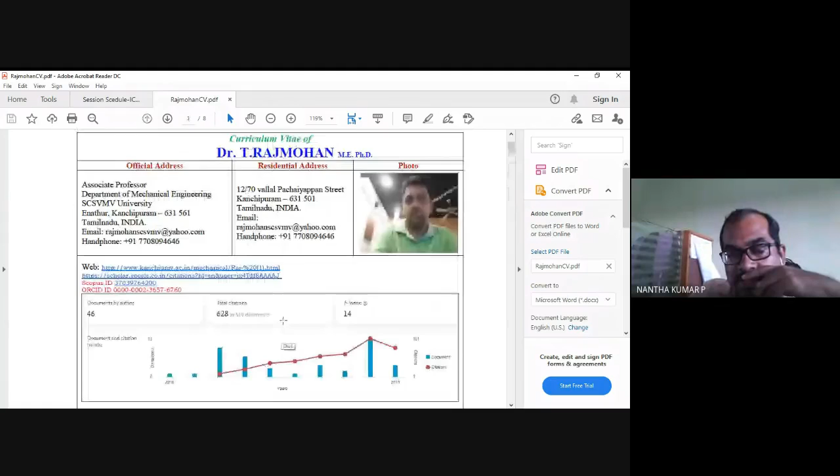Sir, the session is yours. If you want to talk to the audience, you can inform them about the rules and regulations, all these things, sir. Yes, sir. Okay, no problem. Rules and presentation, sir. Yes, sir.

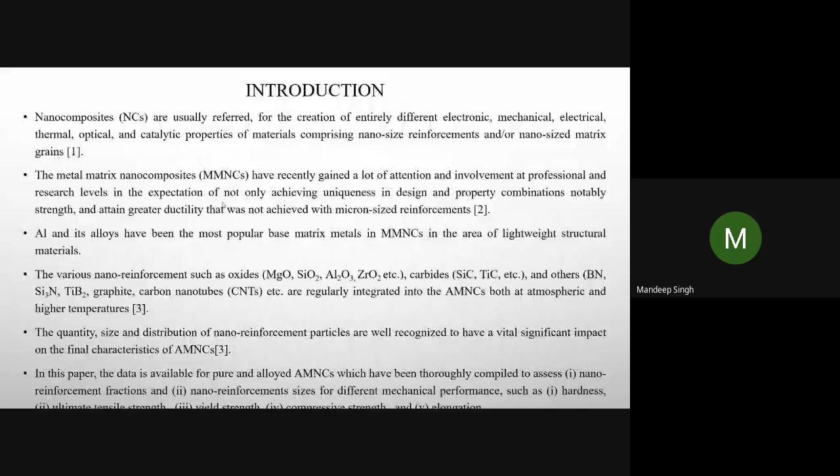So next, in the literature review, we are starting the mechanical properties with the hardness. So what is the hardness? Before starting, what are the mechanical properties? The mechanical properties involve a reaction to an applied load that determines the range of usefulness of a material. The most common properties are considered in this review paper.

So first is the hardness. Hardness is the measure of a material's resistance to localized permanent deformation. The nano-sized reinforcement increases the dislocation density in the base matrix as per the proper particle size distribution. The higher the reinforcement applied to an optimal value, the more constraints on the dislocation movement would be. Hence, the overall hardness of AMNC will increase.

So Poovazhagan and others revealed the increased hardness progressively of the AA6061 B4C nanocomposites by increasing the nanoparticle volume percentage as 0, 0.5, 1, 1.5, 2, 2.5, and 3. The strong bonding of aluminium with the boron carbide nanoparticle prevents the dislocation movement, causing the improved hardness to 91 BHN Brinell hardness at 2.5 volume percent nanoparticle, as opposed to the 40 BHN of the base alloy.

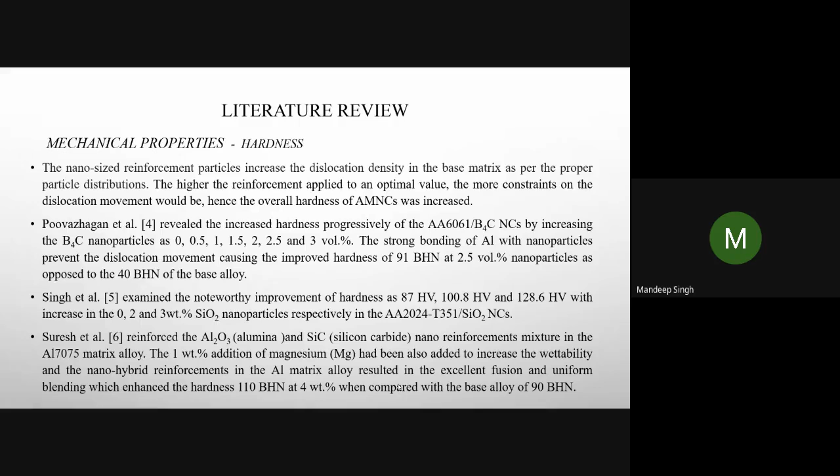Then next we have Suresh and others, who reinforced the alumina and silicon carbide nano reinforcement mixture in the Al7075 matrix alloy. The 1 weight percent addition of magnesium has been added to increase the wettability of the nano hybrid reinforcements in the aluminum matrix alloy, which resulted in excellent fusion and uniform blending, and resulted in increased hardness to 110 Brinell hardness at 4 weight percent when compared with the base alloy of 90 Brinell hardness number.

The graphene nanosheets refined the grain size more homogeneously, leading to increased dislocation, Orowan strengthening mechanism, and the consequence of thermal mismatch. The hardness was enhanced to 174 Vickers hardness for the aluminium graphene nanosheets nanocomposite, in contrast to the 81.2 Vickers hardness of the base matrix.

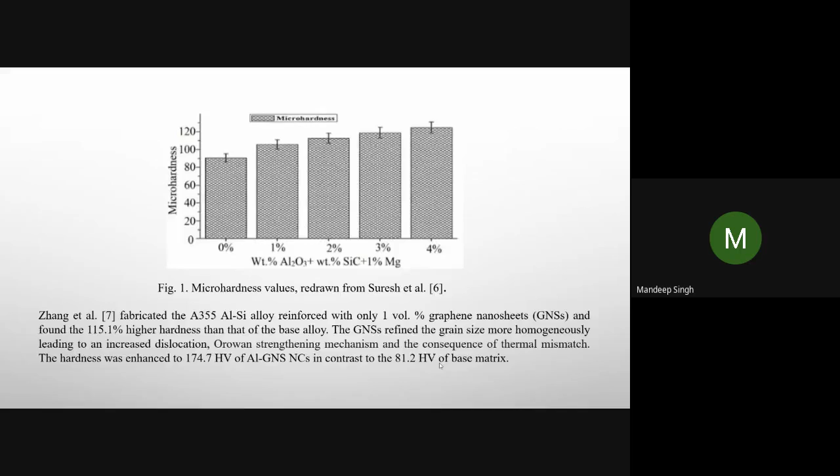Then we have the second mechanical property, that is the ultimate tensile strength. So what is the ultimate tensile strength? It is the ability of a material to resist tearing due to tension. It is measured in pascals, or it has units of Newton per meter square. It is investigated from the published studies that the UTS of the AMNC has been strengthened by the nano reinforcements. The tight intermetallic bonding causes the wettability.

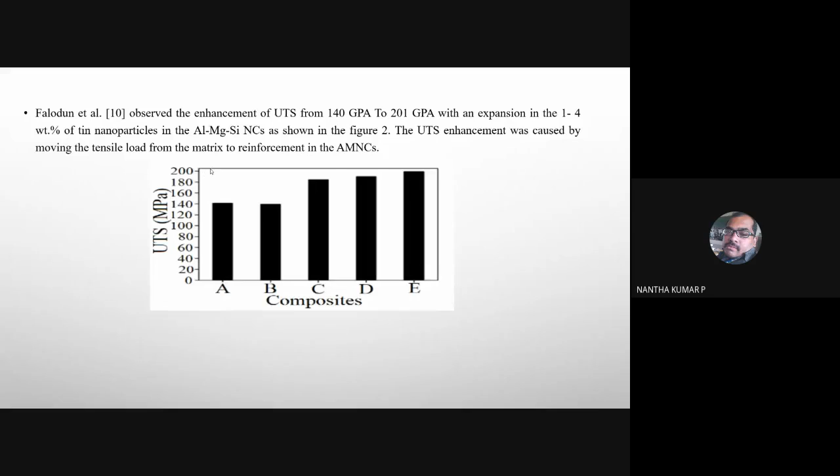Sorry, dear sir. Mandeep, sir, please conclude yourself, sir. Yes, chairperson advised 5 minutes for presentation. Can you conclude, sir? It is a review paper, so I have reviewed from the different... No, no, 5 minutes for presentation, sir. Let others also present. Okay, let me wind up. Yes, please, please. Thank you, thank you, sir.

So Poovazhagan and others indicated a 125% increase in ultimate tensile strength of the AA6061 boron carbide nanocomposite in contrast to the alloy. The boron carbide nanoparticle improved the ultimate tensile strength at 0.5, 1, 1.5, and 2 volume percent.

But the aforementioned beneficial effect of adding nanoparticle weakens the AMNC, which diminishes the UTS. This is due to the high dislocation density and the interaction of the dislocations with the ultra-high nanoparticles. So the nanoparticle at the grain boundary interior shows homogeneous dispersion, which improves the UTS of the AMNC.

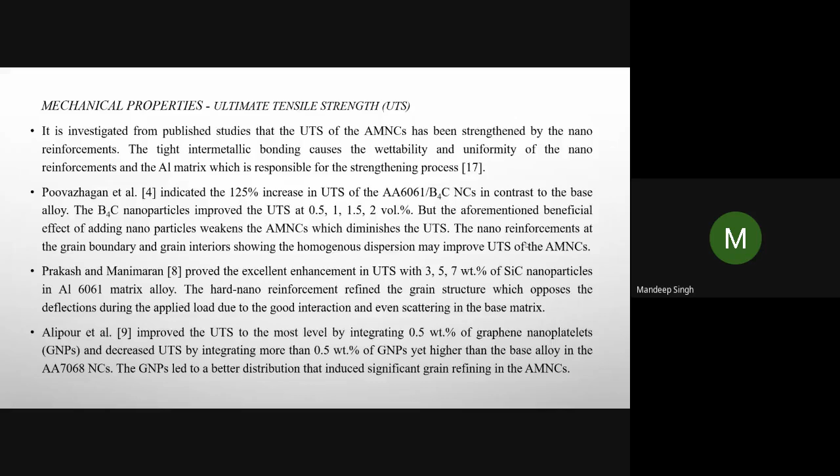Coming to the yield strength: what is yield strength? It is defined as the maximum stress that a solid material can withstand when it is deformed within its elastic limit, or it can be defined as the stress at a point where the stress-strain curve deviates from proportionality. That is the yield strength of the material.

Li and others made use of TiN nano reinforcement particle by varying the weight percentage of 1, 2, 3, and 4 in the Al2024 alloy. The increasing titanium nitride content improved the yield strength up to 3%, and the value recorded at 2 weight percent was 730 megapascals, which was 185% higher than the baseline.

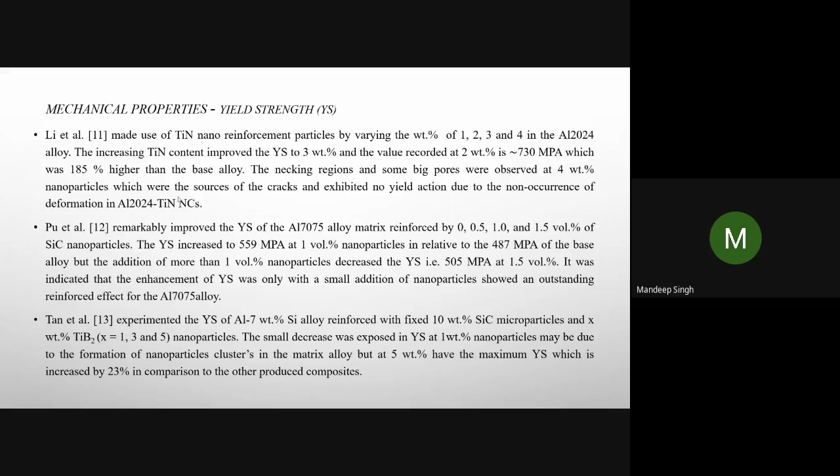The reason is that necking regions and some big pores were seen at 4 weight percent nanoparticle content, which become the source of cracks and show no yield action due to the non-occurrence of deformation in Al2024 titanium nitride nanocomposites. Then the next mechanical property we have is the compressive strength.

What is compressive strength? It is the maximum amount of compressive stress that a material can withstand before it breaks or fractures. Izadpur and others studied 0.4, 0.8, and 1.28% of aluminum oxide nanoparticle in the...

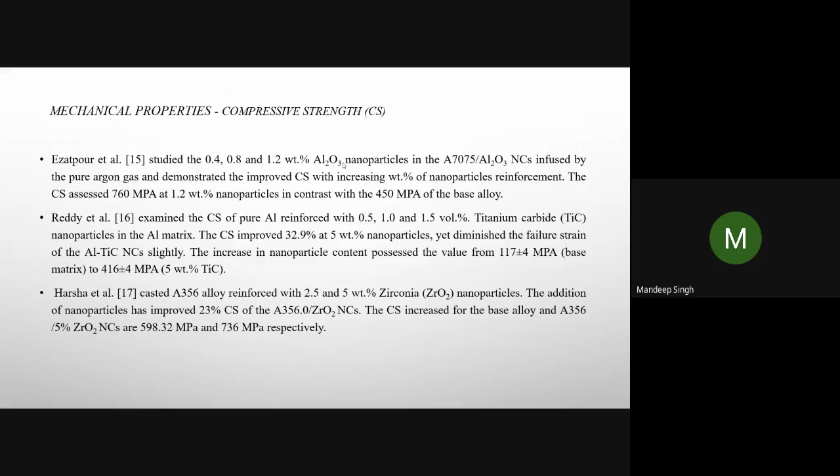Conclude yourself, sir, please. Okay.

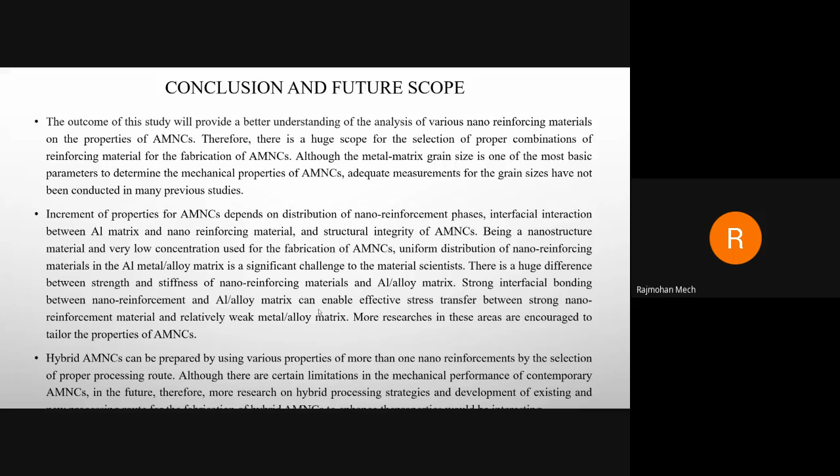So while you... Sir, I have just reviewed the properties regarding the comparison of disadvantages of microparticles. You should also investigate the advantages of nanoparticles over microparticles by comparing them. So many comparisons are available in the literature, which would make it a better study. Okay, sir, I agree.

One more question: whether the nanoparticle will act as a filler or reinforcement? Sir, nanoparticle acts as a reinforcement. Then what is the difference between filler and reinforcement, sir? Sorry, sir, it can be... Okay, okay sir, no problem.

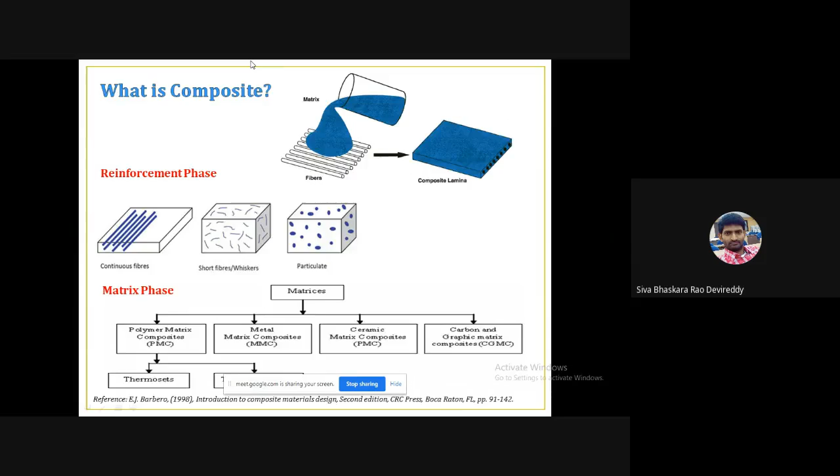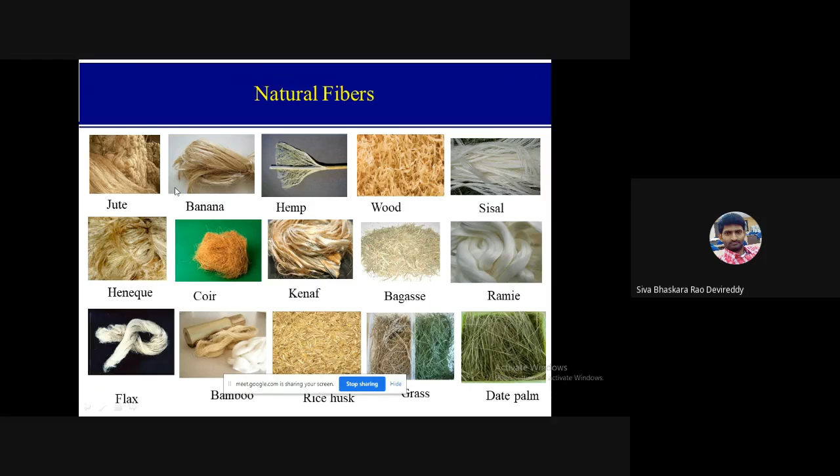Coming to the reinforcement phase, these may be synthetic or natural fibers. Nowadays, due to environmental concern, many researchers are working on natural fiber reinforced composites. The slide represents different natural fibers available in nature. Examples are jute, banana, hemp, wood, sisal, heneque, coir, kenaf, bagasse, ramie, flax, bamboo, rice husk, grass, date palm. So many natural fibers are available in the literature.

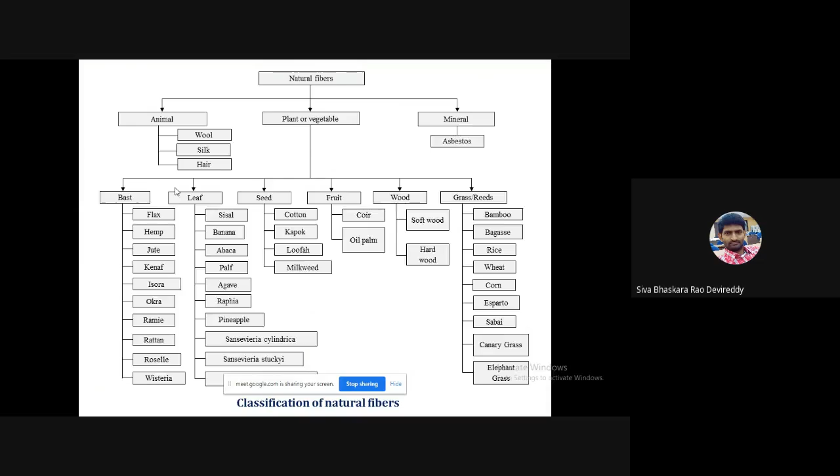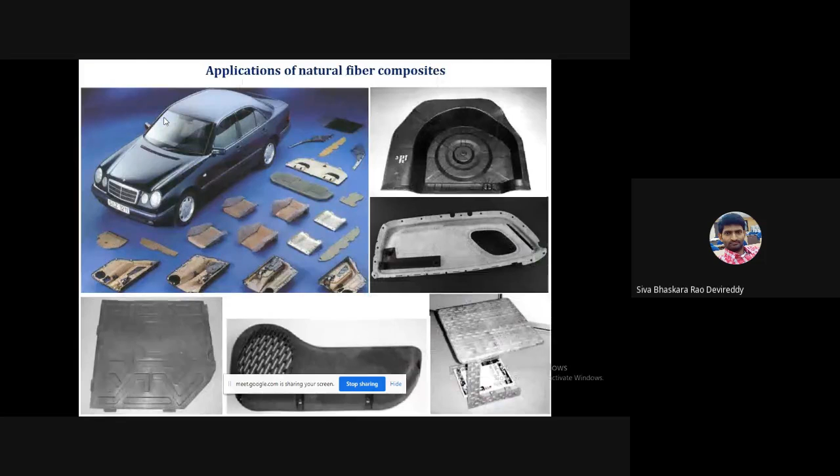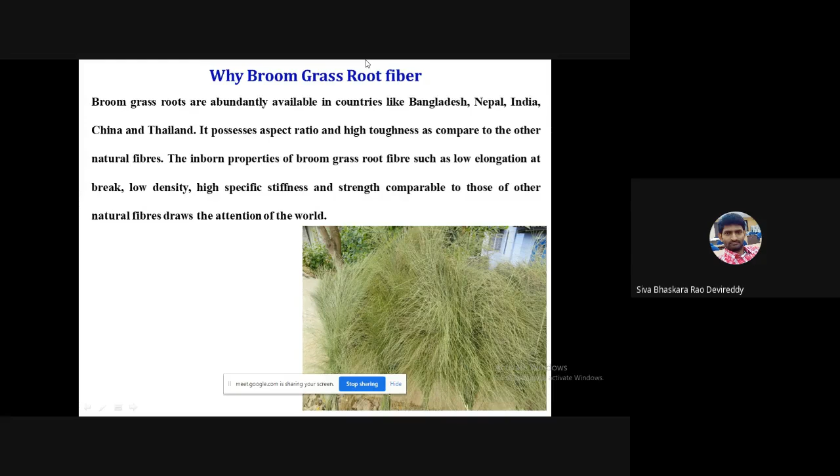Out of these natural fibers, we selected broom grass root fiber as one of the reinforcement materials in our research work, because broom grass root is available in countries like Bangladesh, Nepal, India, China, and Thailand, and possesses high aspect ratio and high toughness compared to other natural fibers. So we selected broom grass root as one of the reinforcement materials to fabricate the composite. The main properties considered to select broom grass root are low elongation at break, low density, high specific stiffness, and strength compared to other natural fibers.

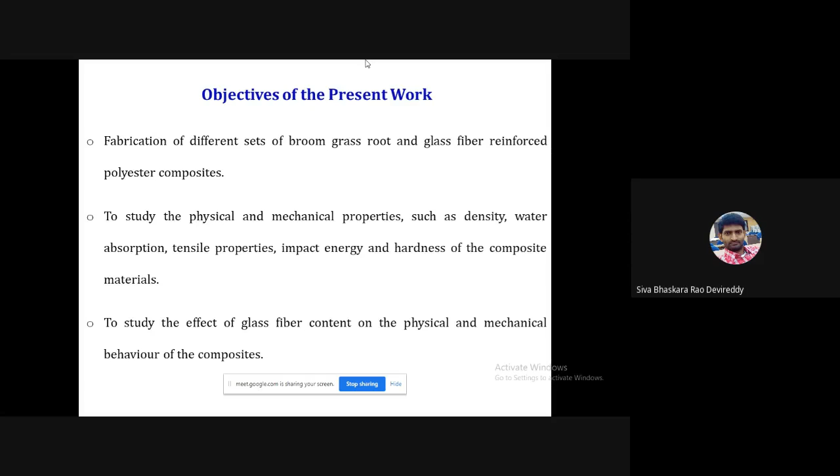The main objective of this present work is to fabricate different sets of broom grass root and glass fiber reinforced polyester composites to study the physical and mechanical properties. In physical properties we studied density and water absorption; tensile properties such as tensile strength and modulus, impact energy, and hardness of the composite materials were studied. Another objective is the effect of glass fiber content on these properties.

Coming to the materials selected to make the composite, polyester is the matrix material we have selected. The polyester and corresponding catalyst and accelerator are purchased from ECMAS Resin Private Limited, Hyderabad.

The density of this polyester is low as compared to the epoxy, that is 1.13 gram per centimeter cube. Broom grass root is selected in the particulate form. Initially, the broom grass is collected from local sources, washed with clean water, and made into powder form. In a particulate form, we are making this broom grass root.

Glass fiber mat is selected as another reinforcement material. Using these two reinforcements and polyester matrix, the composite is fabricated by the hand lay-up technique followed by light compression molding. For curing this polyester, 1.5 weight percentage of catalyst and 1.5 weight percentage of accelerator were mixed.

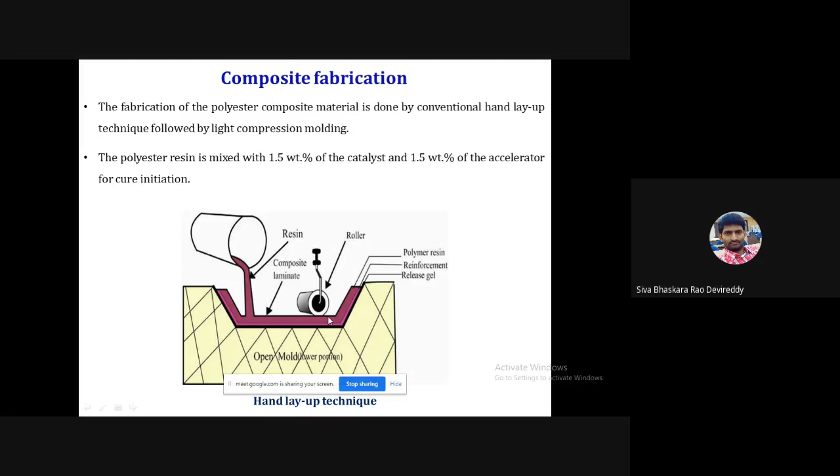After mixing the polyester with the catalyst and accelerator, the broom grass root particulate is added into the polyester resin, and the glass fiber was placed layer by layer. By using this hand lay-up technique, the composite is fabricated. Initially, the polyester is applied over the mold and the glass fiber mat is placed in such a way as to get 4 mm thickness.

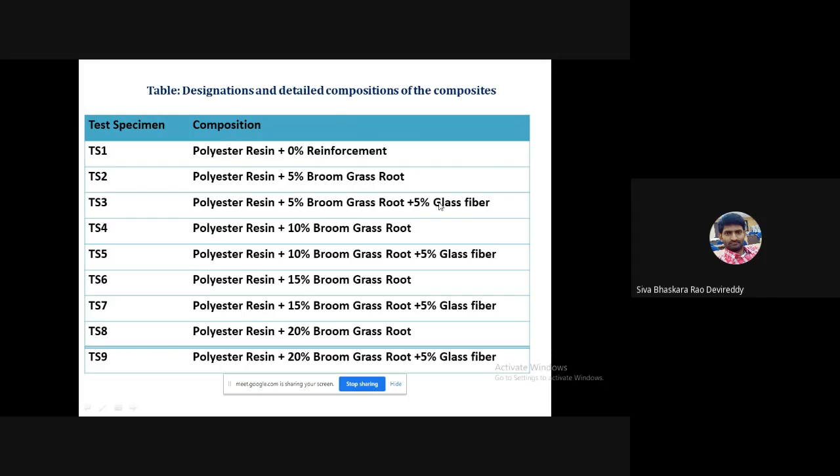A total of 9 sets of composites are shown in this table. These are the composites fabricated using this hand lay-up technique.

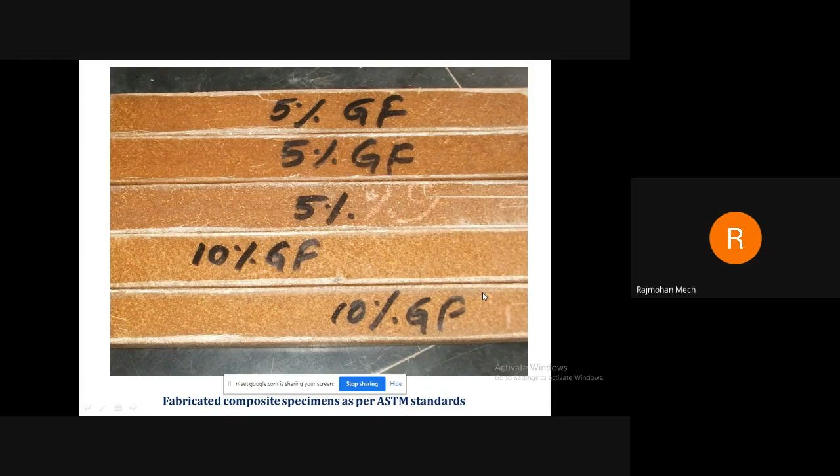Sir, 5 minutes are allowed for presentation. Okay, yes sir. You have wasted your time. You are giving introduction and other applications. Directly go to results and discussion. Conclude, sir, because other participants are waiting. Yes sir, in 2 minutes it will complete.

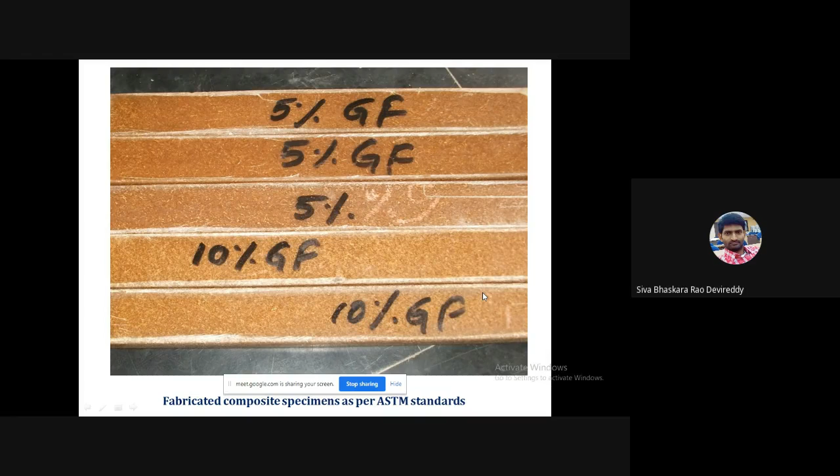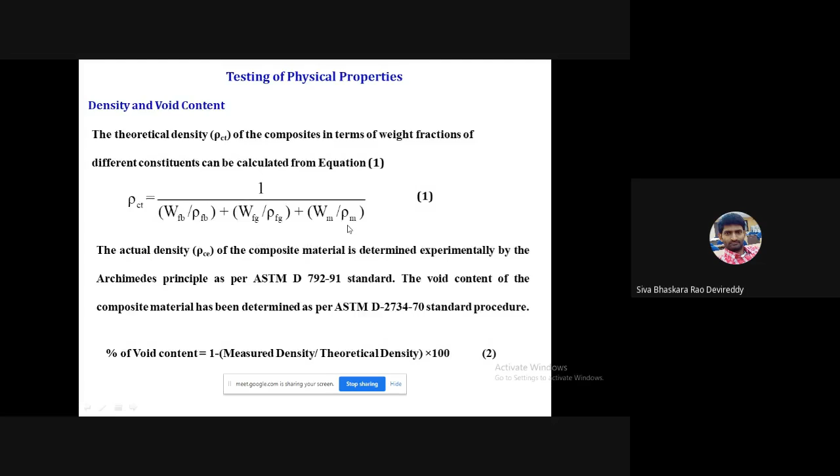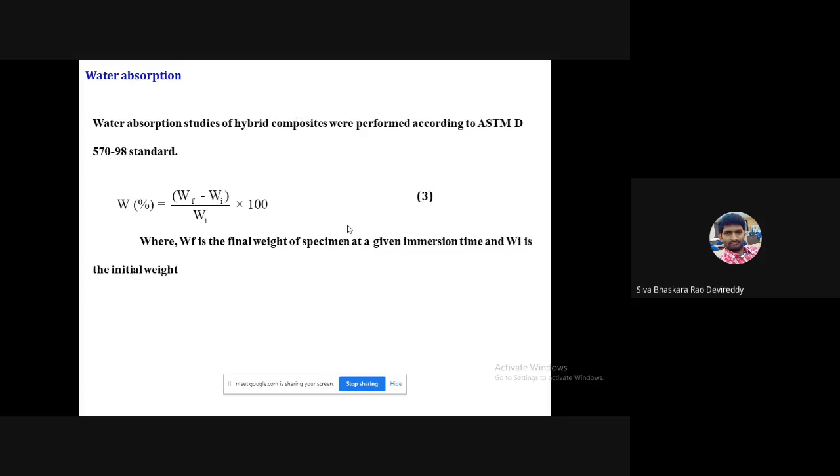These are the fabricated composites with different percentages of broom grass root and glass fiber. Next, coming to characterization, density and void content were calculated. The theoretical density was calculated by equation 1, given by Agarwal and Broutman, and experimental density is calculated by the Archimedes principle. The water absorption of the composites was performed as per ASTM D570 standard. The difference between the specimen's weight before and after immersion was taken and calculated using this formula.

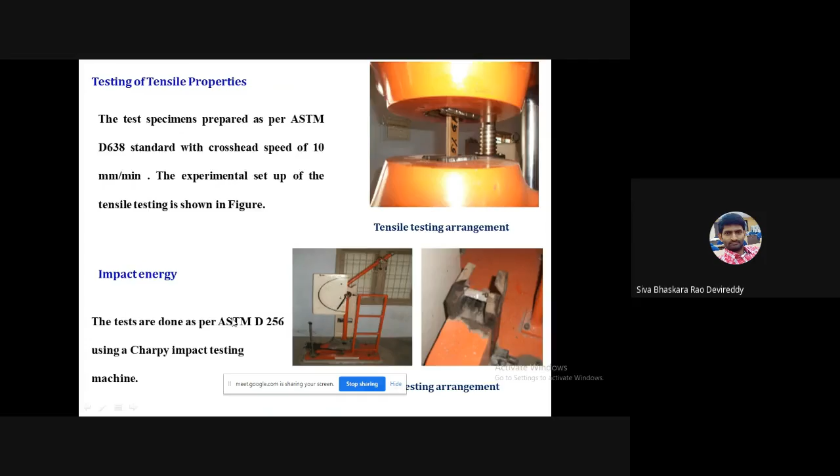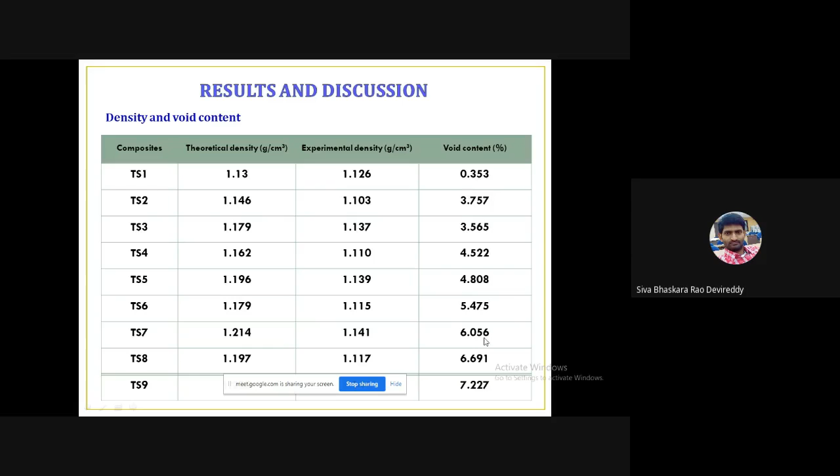Coming to the results and discussion, theoretical density and experimental density are shown in this table. The difference between these two gives the volume of void content. By increasing the fiber content, the void content of these composites increases. Water absorption of the composites also increases with immersion time. The maximum water absorption was observed for the composite TS8, which has 28% broom grass root without any glass fiber.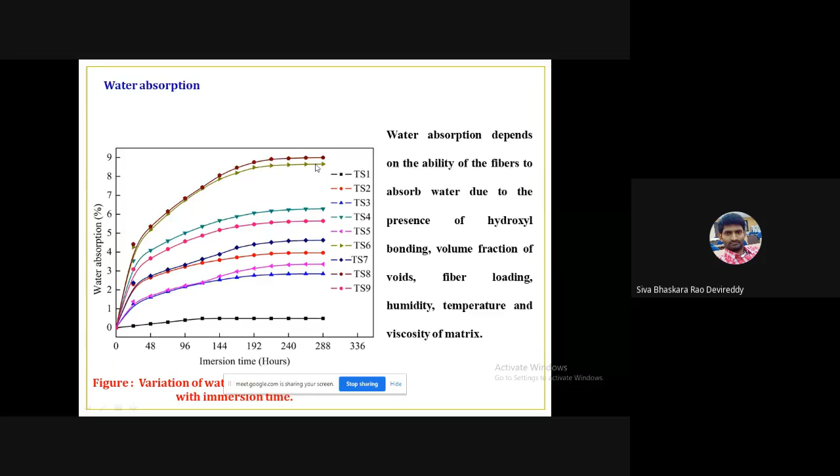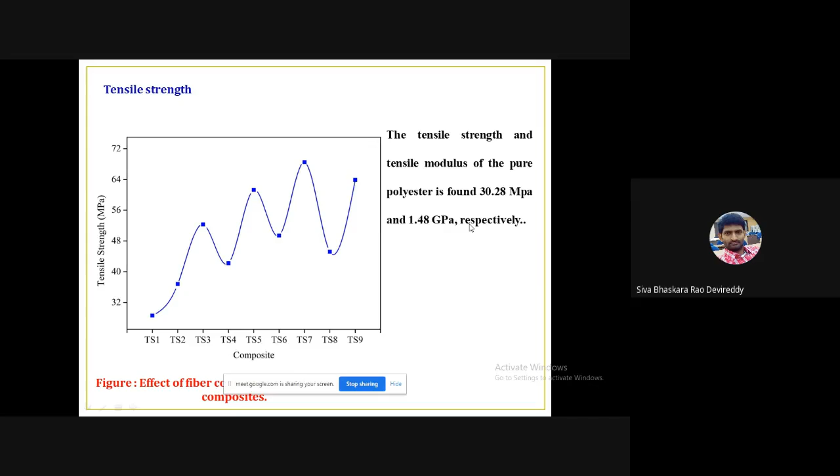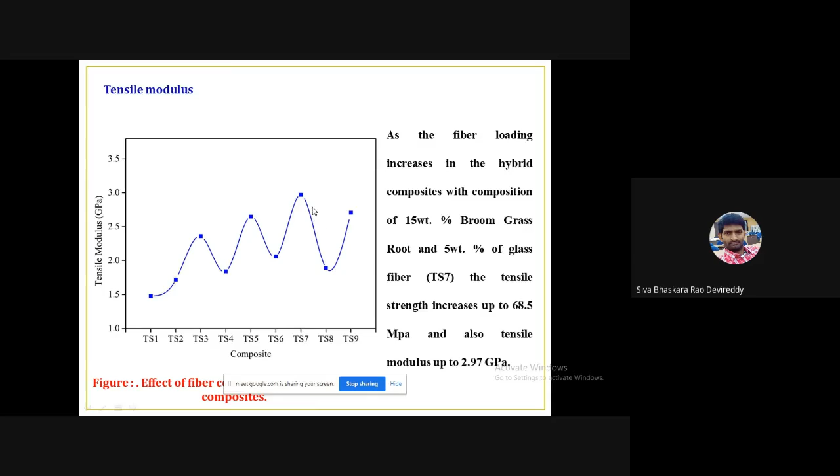Tensile strength of the composite. In the tensile test, we calculated tensile modulus and tensile strength. Initially, the neat polyester has a tensile strength of 30.28 MPa and tensile modulus of 1.48 GPa. When adding the reinforcement phase, both tensile strength and modulus increase, and the maximum tensile strength is 68.5 MPa and tensile modulus increases up to 2.97 GPa at 15 wt.% broom grass root and 5 wt.% glass fiber. That is the specimen designated TS7, which has more tensile strength and modulus compared to the other specimens.

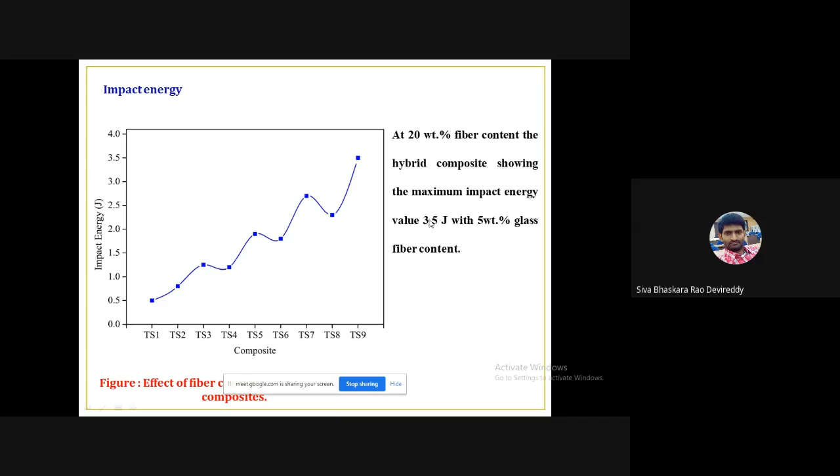Impact energy gradually increases with fiber loading. The maximum impact energy is found to be 3.5 joules. Similarly, the Brinell hardness also increases. The maximum hardness is found to be 97.94 Brinell hardness number at 15 wt.% of broom grass root and 5 wt.% of glass fiber.

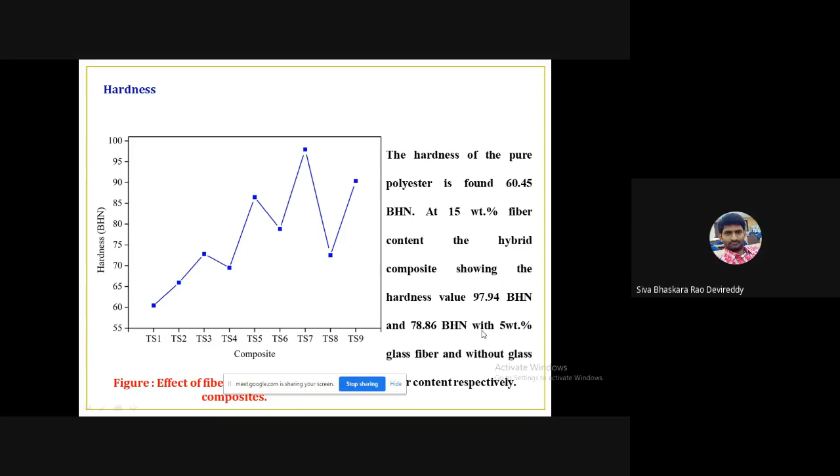Sir, kindly conclude yourself. You are exceeding the time, please.

These are the conclusions. The void percentage increases. The maximum water absorption is found to be 8.99%, the maximum tensile strength is 68.5 megapascal, the maximum tensile modulus is 2.97 gigapascal, and the hardness and impact energy values are found to be 97.94 Brinell hardness number and 3.5 joules.

Compared to this neat polyester, adding the broom grass root and the glass fiber gives better values, and when we add only the broom grass, it has less impact on these properties. The combination of glass fiber and broom grass gives the maximum properties as compared to the other two.

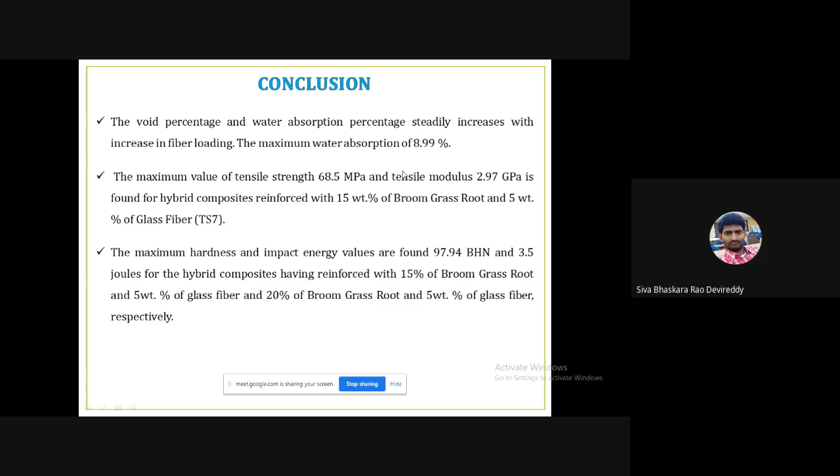Actually, you have fabricated hybrid glass broom grass fiber. Yes, sir. And you have not shown any microstructure, because only by seeing the microstructure can we confirm the presence of the fiber and the glass fiber, and whether there is uniform distribution or fiber pull-out. Yes, sir. So you have missed the main part.

You are doing material science; without microstructure we cannot do anything. So the major part is missing in the presentation. Tensile, flexural, these are all experimental work. By seeing the microstructure we can give comments, and you should prove the presence of glass and other particles in your fabricated specimen.

Okay, so we can call the next one. Okay, sir. Thank you, sir. Shall we call the next participant? Mr. Vijay Bubri, sir, is he there? Suresh Babu, Sivabaskar, Haridasan, sir, are you ready? Sir, unmute yourself. Sir, it's not audible. Okay, we will call the next participant. Mr. Sundar Selvin? Yamalata, madam. Hello, I am audible now, sir. Are you able to present? I am able to present. Is it visible now? Sir, you can proceed.